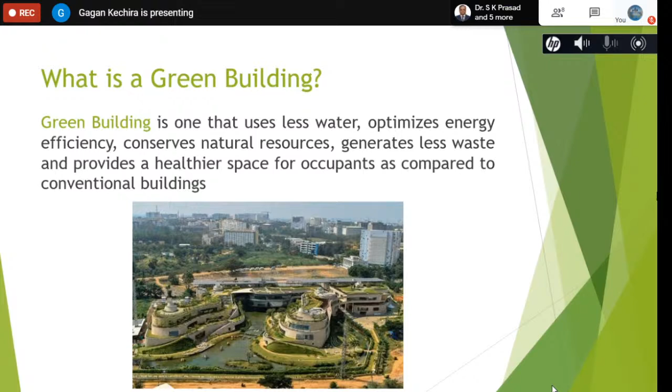So green building is not something which just uses less water or optimizes energy efficiency, but it does all these things - whether using less water, generating electricity using renewable sources, conserving natural resources, being energy efficient, generating less waste, and also providing a very healthy environment for building occupants compared to a conventional building. That is what defines a green building.

So what are the key attributes? The key attribute of a green building is that the concept of sustainability is taken care of during the course of the project - meaning it is integrated at every different step. I want you civil engineers to understand that sustainability is not just in the scope of the architect, nor the electrical or mechanical engineer, nor just the civil engineer. It is in the scope of every individual working on that project, whether it's the architect, the construction agency where civil engineers come in, or the design team designing electrical or renewable systems.

It is the plumbing team, it is also your landscape team, and it also drops down to those providing materials such as your flooring, paneling, and false ceiling, etc. So the first key attribute of a green building is that the concept of sustainability is embedded at each and every step of that particular project, right from design to operation and maintenance and everything in between.

The second attribute is use of sustainable building materials. I'll touch upon why we use sustainable building materials and what is the need for that, but right now let's just say that the use of sustainable building material is another attribute of a green building. The third is use of technologies which are efficient and far more sustainable than the business-as-usual model that we use. The fourth is that it is able to reduce your resource utilization, whether during construction or post-construction.

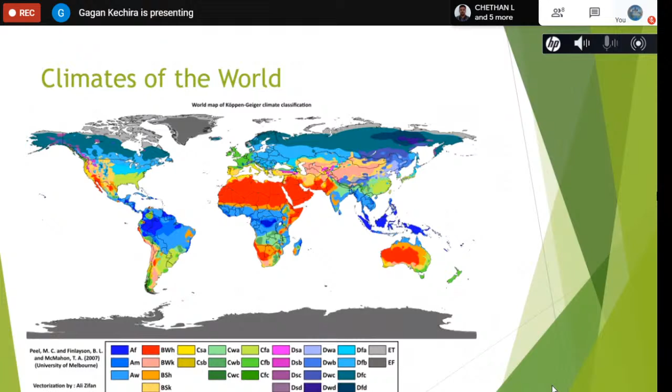I'm sure as civil engineers you would have heard of the NBC, the National Building Code. NBC has broken India into 5 climatic zones: hot and dry, which is normally the western zone - Rajasthan, Gujarat, some parts of Maharashtra.

Then we have the warm and humid zone, which is the coastal zones of India or the northeastern zones. Then we have the composite zone, which is the northern and middle part of India, where we have extreme summers and extreme winters.

I'm lucky to be sitting in a place with a temperate climate, which comes under the temperate climatic zone. Then we have cold climatic zones, towards the northeast and north part of India. Now if you go back to the previous slide, there are 29 classifications there, whereas in India there are 5.

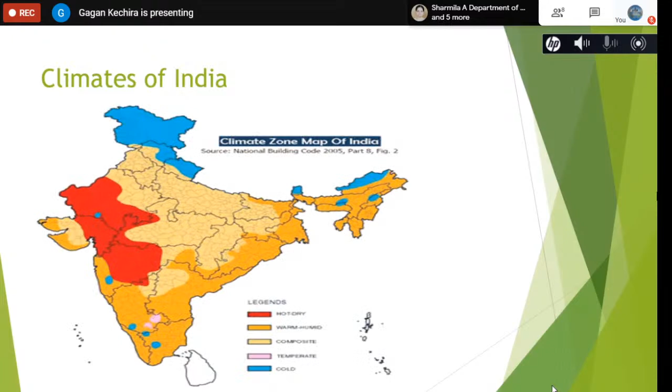Then, comparing India and the United States with respect to metro population, city-wise cumulatively, India's metro population is higher than that of the USA, and the metro land area is higher in the USA compared to India.

However, the population density, because population is more and area is less, is much higher in India than in the USA. Climate-wise as well.

So let us take an example of, let's say, Mumbai and New York City.

If you look at the table, the highest temperature recorded in Mumbai is in the month of April, which is 42.2 degrees. And the lowest recorded is probably in January, which is 16.8.

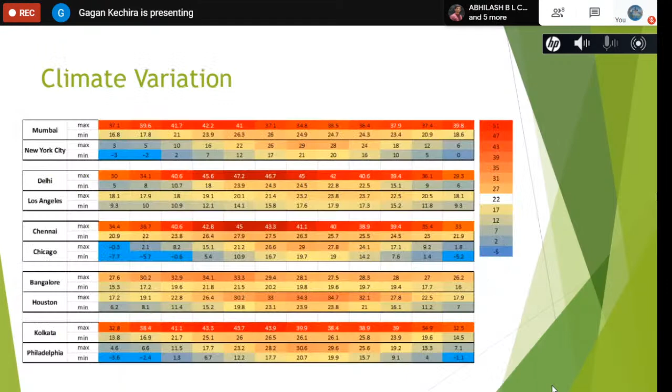Absolutely not. That is the reason I made a comparison between India and the US with respect to the land, the population, and the climate as well. And that is where GRIHA comes into the picture.

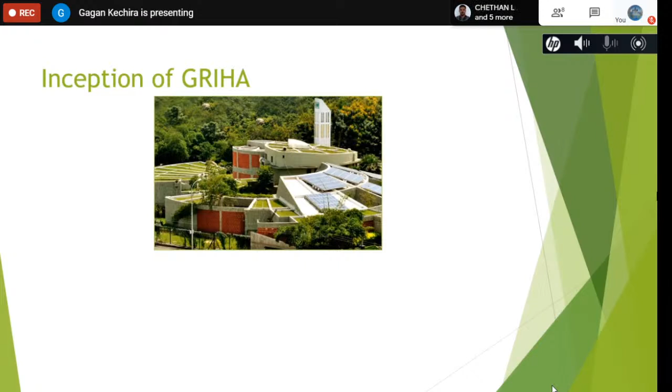So here is where the inception of GRIHA started. This building that you see is based in Madhapur in Hyderabad, currently Telangana. This was the first green rated building in our country, and this is a LEED Platinum rated building, rated in the year 2001.

Now, LEED is another sort of rating system available in our country, run by GBCI, the Green Building Certification Incorporated, which was erstwhile also known as the USGBC, or the United States Green Building Council. Of course, that is part of the training wing at this point of time.

So USGBC came out with a rating, and this particular building was rated under the USGBC's LEED rating variant, and it got the highest rating, which is the LEED Platinum rating, back in 2001.

Now, please remember, when you are rating a green building, there are three entities involved. One is the client, which in this case was CII Godrej. The second is the green building rating body, which in this case was USGBC, or the United States Green Building Council. And the third entity is called the green building consultant.

Now, this project was being consulted by TERI, or the Energy and Resource Institute, erstwhile known as Tata Energy Research Institute. When they were collating the documents, doing the simulations, etc., and comparing it, they realized one fact.

They realized that the concept based on which this particular building was being rated is not as per the Indian context, be it the climate or the norms, like the NBC or the CPCB norms or the ECBC, etc. So then TERI decided, why don't we have our own indigenous rating system?

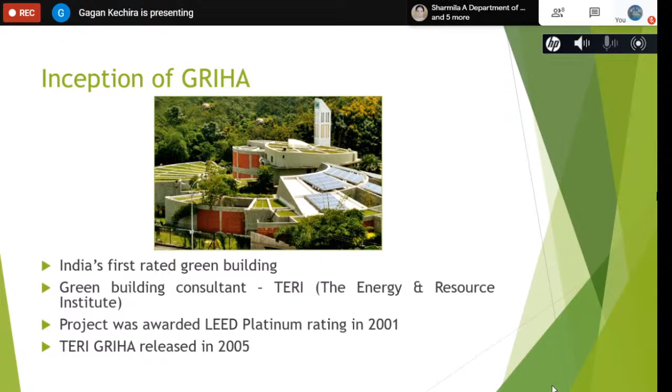And that is how TERI GRIHA was launched in the year 2005. That was the inception of GRIHA. Now, GRIHA stands for Green Rating for Integrated Habitat Assessment. That is the full form.

It is nothing but a tool. When you're rating your particular building, this GRIHA becomes a tool to facilitate the design, construction, and operation of a green building, and in turn measure how green your particular building is, or rather measure the greenness of a building.

Now, this particular rating body, GRIHA, which I represent, is being adopted by the Ministry of New and Renewable Energy, Government of India, and of course was developed by the Energy and Resources Institute. And the formula by which we go is: what gets measured gets managed.

I have a very small anecdote to this. Growing up, or even now, for those who have kids, or who have been in the position where your parents would compare your electricity bill and say, in June I spent only 1,000 rupees on electricity bill, why even in July, having the same climatic conditions in Mysuru, am I paying 200 rupees more? What is going wrong?

Turn off the light before you exit a room. Turn off the geyser, why are you having the geyser? So until unless you measure it, you will not be able to manage it, right? So that is the concept by which GRIHA Council works: what gets measured gets managed.

The timeline, as I said, is TERI GRIHA was launched in 2005. It was adopted by the Ministry of New and Renewable Energy in the year 2007, and the council itself was established in 2009.

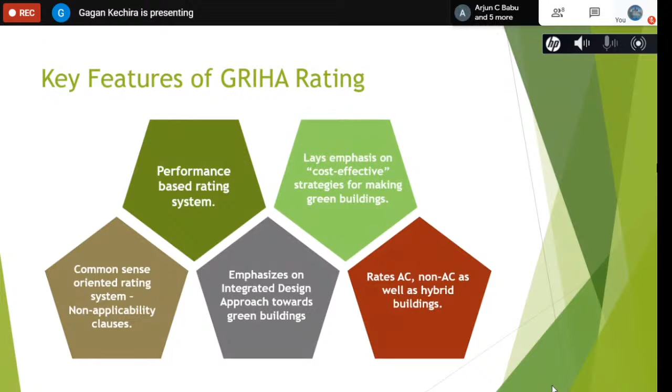GRIHA version 2015 has 9 different sections. You need to identify what these sections are, and always think about the 3 pillars of sustainability, and how GRIHA is tackling or addressing the requirements of these 3 pillars.

So here we have site planning, construction management, energy, occupant comfort and well-being, water, sustainable building materials, solid waste management, socio-economic strategy, and performance monitoring and validation. These are the 9 different sections based on which your particular building is judged or rated.

The point weightages are in front of you. The highest weightage in our rating is given to energy, about 20%. As the description notes, energy efficiency is an important aspect, and identifying the importance of not just energy efficiency but energy in general, and the role it plays in making a building sustainable, is what we're addressing. Therefore the highest weightage in this rating variant, or any other GRIHA rating variant, is given to energy, about 20%.

Then we have water. In our country, we've read articles, reports, and studies saying the country is running out of water, Bangalore is running out of water, but unfortunately we don't look at water as a commodity. So we thought it's high time water is looked at as a commodity, and that its importance in a project, post-construction and during construction, is taken care of. Therefore the second highest weightage is given to water, about 17%.

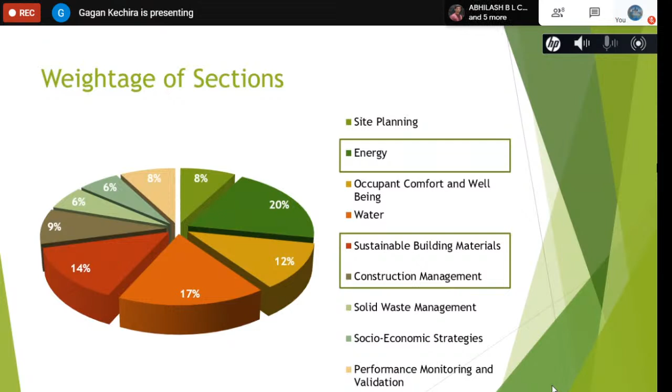So the points you can achieve - I said it's a performance-based rating system, and you'll be rated on 100. In case your project achieves somewhere between 25 and 40 points, you're eligible for 1 star. Every 15-point increment, you get 1 additional star.

So if you want to look at those buildings which are sustainable or highly sustainable, those would come under the bracket of a 5-star rated GRIHA projects, and that would have a point between 86 and above.

Now, without any further ado, let's get into the best part of our presentation. So the energy section of our rating has 3 criteria. Each criteria has an appraisal, meaning what is it that GRIHA is asking a project to do. We will take that up in the slides which come up next.

But out of the 20 points, it's broken down like this. You may also notice points given across the criteria, and also something called M. M essentially means mandatory, meaning that if you don't comply with the mandatory requirements of these criteria, then your project will be denied the rating. Meaning that GRIHA is trying to ensure that there is a bare minimum efficiency or renewable energy generation or use of low ODP materials which is being done in your project.

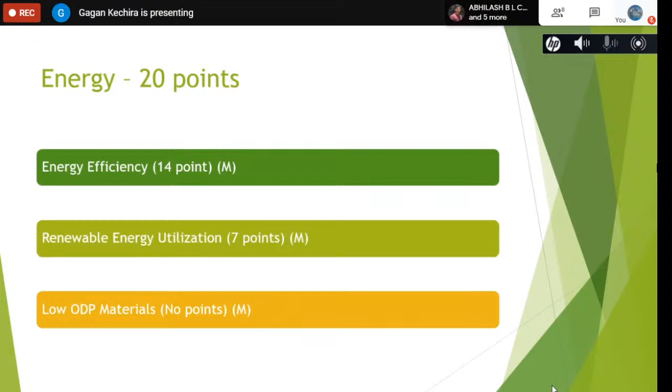So 14 points in our energy section is on energy efficiency. 7 points are attributed to renewable energy utilization, and no points are attributed to low ODP material because the entire criteria is mandatory. Moving on, the approach that GRIHA uses in order to make a building sustainable energy wise

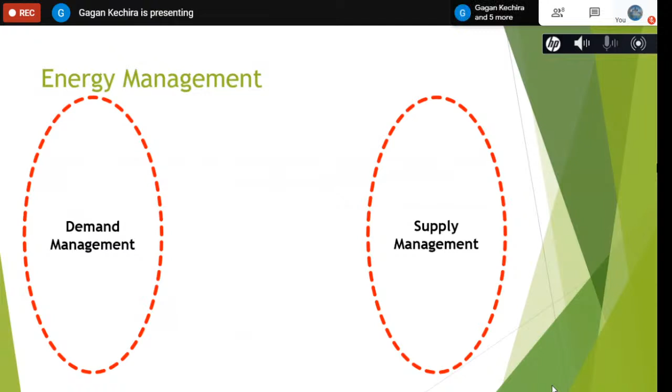is something called demand side management and supply side management. Of course, we've heard this term before, probably not in the context of what I am going to say. So how is it we are going to make a building demand side managed well?

Is by these things. First is by making the building efficient, by ensuring the building is energy efficient. How are we doing that? By probably providing outdoor lighting fixtures which meet the minimum luminous efficacy, or which are provided with automatic timer control. That is one way of reducing your energy consumption.

The second thing is by the design itself. So like I said, the design of a building also plays a factor in making a building green. Fun fact, the way that you orient a building, in which direction the building is oriented, will have a huge impact on the energy consumption of that particular building.

I'll give you a very small example. Let us say that a building is oriented in such a way that the common spaces - let's take an institute - let us say that the commonly utilized space, that is your classrooms, or your HOD's office, or the principal's office, etc., is oriented on the east and west facade, that is the east and west direction. Now, is that efficient? Definitely not.

Why is it not efficient? The sun rises in the east and sets in the west. So as it takes its path, what it is doing is it is constantly heating up your spaces, which is in the east and the west direction. So if it is constantly heating your space, what would you do to make yourself feel more comfortable?

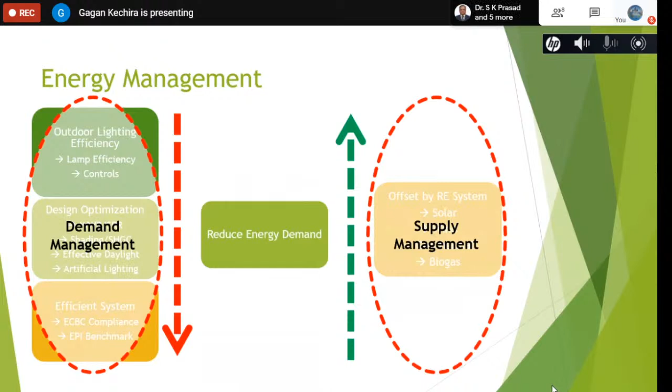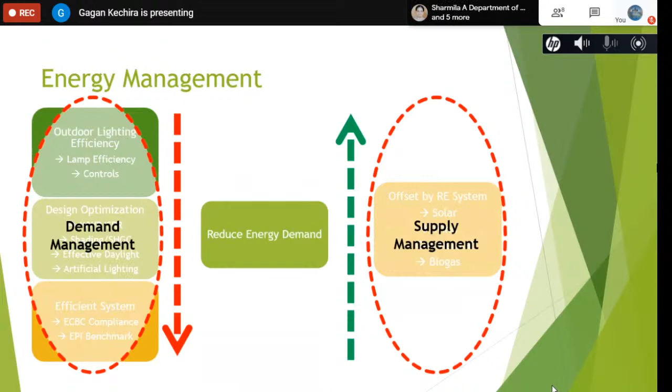So you see the beauty here. First, we are reducing the energy demand by making my building more energy efficient, and then we are offsetting the required energy. Let's assume my building is inefficient and consuming about 1,000 units of electricity a month. By making it energy efficient, I can reduce that requirement to 600 units. And then in those 600 units, or a part of it, I can cater using a renewable energy system. That is exactly what GRIHA is also trying to tell.

So we spoke about ECBC - Energy Conservation Building Code. This is something developed by the Bureau of Energy Efficiency, a department under the Ministry of Power, Government of India, where I had the good luck of working for a few years. There we worked on development of ECBC. Of course this is the older version - we have a newer version launched in 2017, but this particular rating variant talks about ECBC 2007.

Now ECBC looks at 5 components of a building. The building envelope - meaning the building's walls, windows, glass, the facade, the roof, etc. The second aspect talks about HVAC, or heating, ventilation, and air conditioning - what kind of chillers and AC systems are you providing, and are their efficiencies as per the requirement? That is what ECBC does.

Service hot water and pumping is another aspect which ECBC 2007 looks into. Then we talk about lighting, where artificial lighting is looked into - is it as per the task specific lighting requirement? And finally we talk about electrical power, where we're talking about the motors installed in your site, the kind of transformers, piping and ducting that you use, etc.

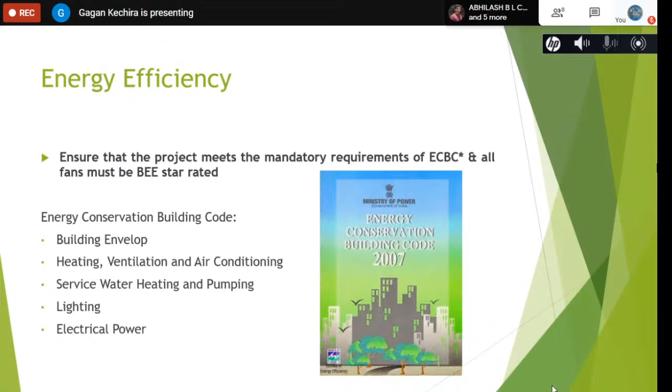And in GRIHA, only and only if you are able to meet the mandatory requirements of this ECBC will your project be eligible for the rating. And also GRIHA says that all your fans, that is your ceiling fans, have to be BEE star rated.

Now apart from that, we also talk about the envelope peak heat gain. So I told you that with the type of facade you design, there is some heat being transferred. Please understand that heat is not only transferred through your windows, but also through your roof and your walls. So GRIHA is saying, as per your climatic zone, you will have to meet GRIHA's threshold for building envelope heat gain factor.

Now, in case yours does not fall into the purview of what is being mentioned here, it basically means you will have to design a heating, ventilation and air conditioning system of a higher capacity. And what happens if you install a higher capacity system and constantly use it, your energy consumption would go high. Therefore, this is something taken care of under the energy efficiency criteria of a GRIHA rating.

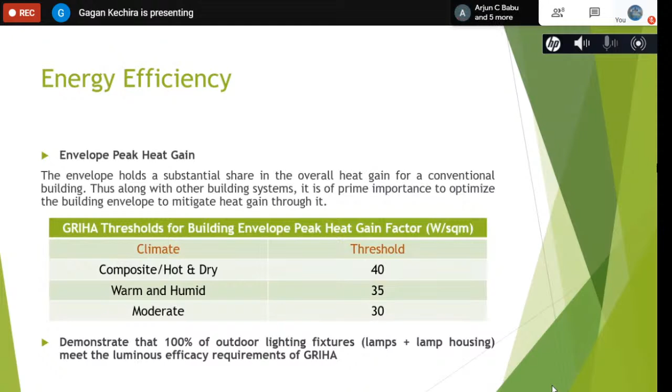Then we say that 100% of your outdoor lightings, whether it's street lights, floodlights, or facade lights, everything has to have a minimum luminous efficacy of 75 lumen per watt as per GRIHA.

And then we come to the point of EPI, which stands for Energy Performance Index. It might sound complex, but it's very simple. It is nothing but your building's annual energy consumption divided by its built-up area. So that is what EPI is.

So what GRIHA says is, depending on the typology of a building, the scenario of your building, or the operational aspects of a building, your EPI has to be less than what has been prescribed by GRIHA.

For example, let's say I work in a commercial facility in Bangalore, which comes under the moderate climatic zone, and this facility is operational for 5 days a week and 8 hours a day. So there I have to prove to GRIHA Council that my building's energy performance index is less than 75 kilowatt hour per square meter per year. In case it is not, your building will be denied the rating.

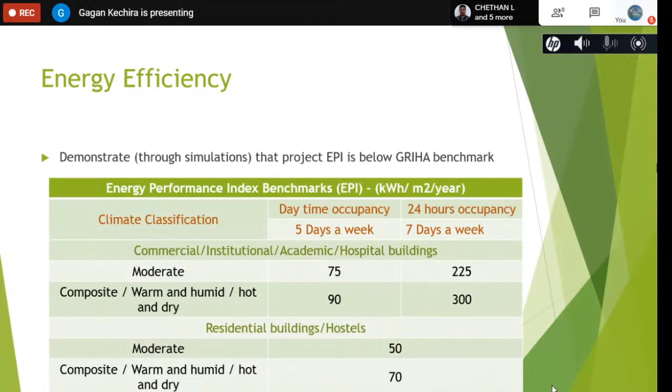Now, in case it is, then you will be eligible for the rating, and also the higher the reduction that you exhibit, the higher the points that you get. So this is how GRIHA is taking care of the energy efficiency aspect of energy.

Next, we talk about renewable energy utilization. Of course, the first thing that comes to our mind when we talk about renewable energy is solar, because that's something which we see, whether it is hot water or solar PV panels.

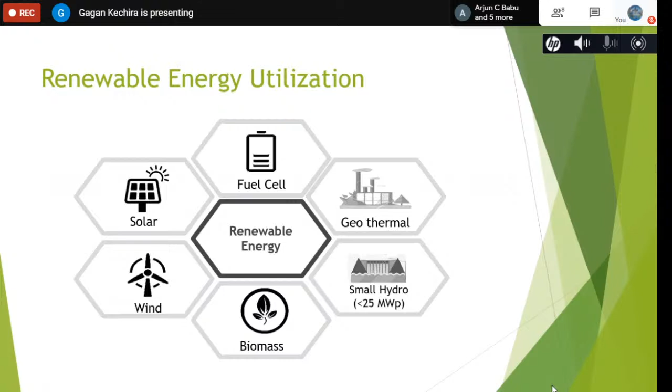Of course, other sources of energy are also considered renewable energy by the Ministry of New and Renewable Energy. Before I come to what GRIHA is trying to do, India's target is that 40% of our energy generation by 2030 will be through renewable energy sources. Right now we are at 23%.

So everything else is with respect to thermal or other ways. We'll have to reach 40% by 2030, so the Indian government also has a short-term plan.

India is going to target ensuring about 175 gigawatt of renewable energy capacity by 2022. That could be in the form of solar, which is about 100 gigawatt, wind, about 60 gigawatt, biopower, about 10, and small hydro, about 5.

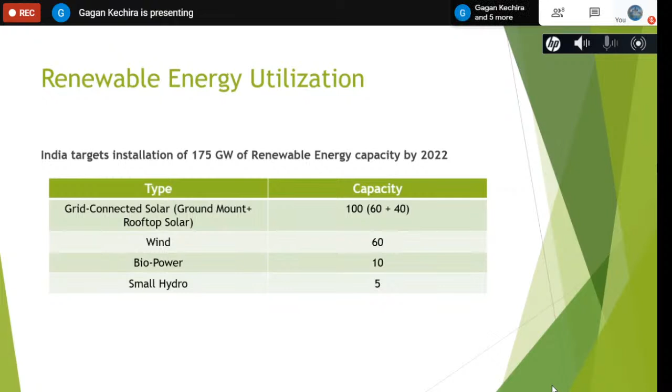This particular slide is about integrating your renewable energy system in your building. The reason I put this slide is to tell you that if the idea of sustainability is embedded in the heads of the people working on the project, then everything becomes simple, because you can optimize your renewable energy system and make it a part of your building itself.

So here we have four examples. One, you can install it on the rooftop like a building material. One, you can install it on the wall as a curtain material. One, you can use it as sunshades. One, you can install it as your daylight or skylights in your project.

See, this is the beauty of sustainability. Everything is interlinked with one another. Aesthetically as well, it would look beautiful because these are panels installed at the same time. That is what I'm trying to get at, the intent. The idea has to be there. The students, the people working in this industry should be aware of what they want to achieve, and if they put their heads into it, I'm sure they can achieve it.

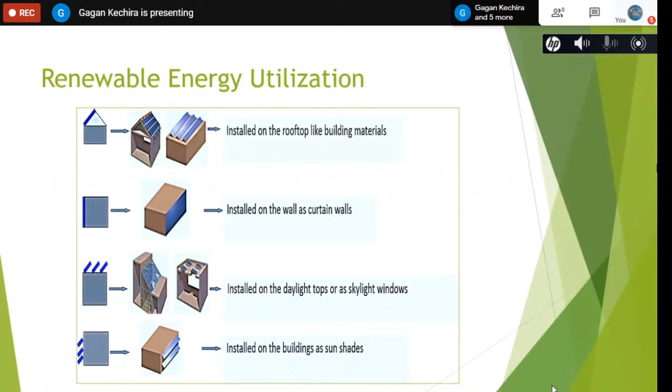So some other examples of how PVs have been integrated in the building architecture as well. And here what GRIHA says is that, with respect to renewable energy, now that you've made your building efficient...

Now what we need to do is make your building cater to that energy requirement through renewable energy generation. So let's say, as I was giving you an example, 600 units of electricity is your consumption. That is where you will have to cater to that 600 units, or a part of it, by installing renewable energy systems in your project. So this is about renewable energy.

So the first thing I've done is reduce my building's energy demand by making my building efficient. The second thing I've done is cater to that requirement through a renewable energy system. The third criteria that we have is about ODP.

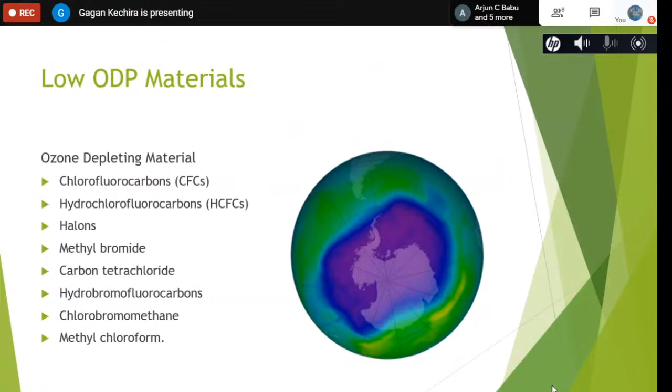Meaning, the interventions we are going to be doing now are something which will show positive effects in another 80 years. So imagine the damage we've already done and the dire situation we are at at this point of time, and the need to go sustainable and construct sustainable buildings is very, very vital and important in today's scenario.

So that was about energy. Now we go on to something you might be interested in, construction management, because this is something a civil engineer would attribute himself or herself to. Here we have three criteria: air and water pollution control, preserve and protect landscape during construction, and construction management practices.

Now air and water pollution control is for 1 point, and it is also a mandatory requirement. In this criteria, we are saying that during construction, you need to ensure ample steps to mitigate air and water pollution. Some of the strategies mentioned are 3-meter high barricading around the construction area, using wheel washing facilities, covering fine aggregates when not in use, sprinkling water over fine aggregates, and if you have a DG set on site, having the stack height above average human height and facing away from the site so it's not polluting the air.

Now, in case you have taken care of spill prevention - we all know there are a lot of hazardous materials which would come into your site. It could be diesel if you're using a DG set, bitumen if you're laying roads, or hazardous admixtures during construction. So what GRIHA is saying is, in case you've taken ample steps to ensure the spillage of these hazardous materials is prevented, you will be eligible for 1 point. So this is about air and water pollution control.

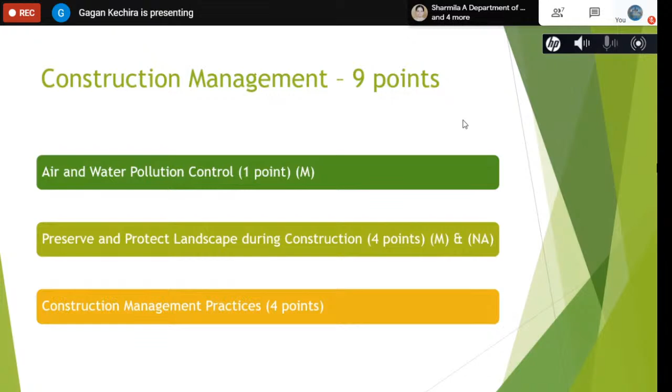So this is the last bit of construction management practices. This basically constitutes your construction management for 9 points. So let's look at some examples.

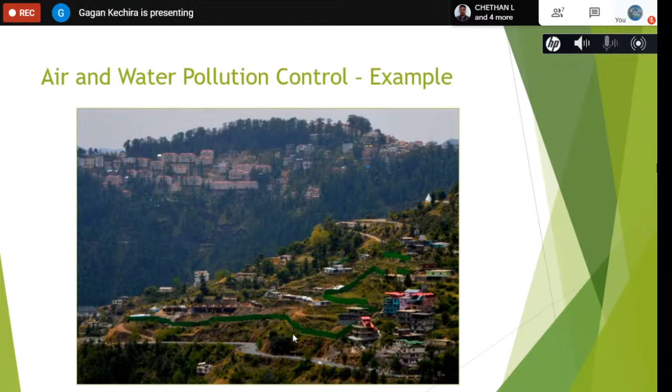This is an example of 3-meter high barricading provided around the site. Good practice. This particular slide is one of my favorites. This is a site in Shimla, and if you can see my cursor, there is green barricading that has been provided. The reason I have this slide is, normally project teams say, sir, we are not able to provide the barricading. But if a project in Shimla, on such a contoured site, is able to provide barricading, any project on a plain site can definitely provide barricading.

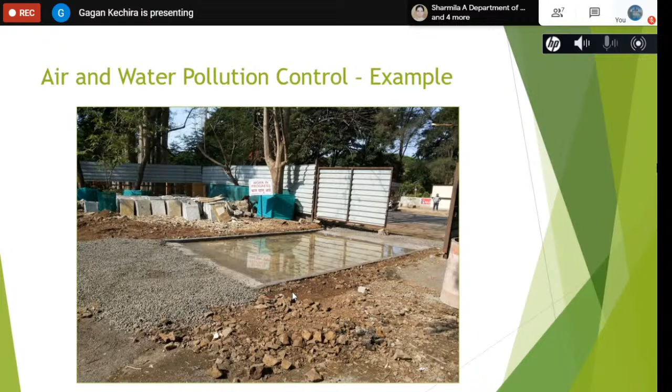Wheel washing facility at vehicular entry and exit. The utility of a wheel washing facility is that when the wheels get wet and move into your site, the fine aggregates or dust would stick to it and not rise, hence preventing air pollution. So this is another example of a wheel washing facility.

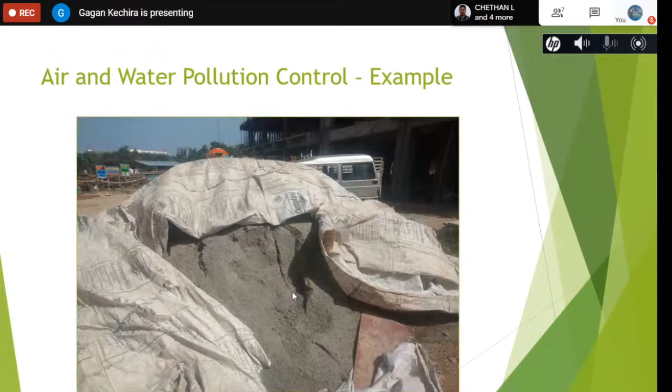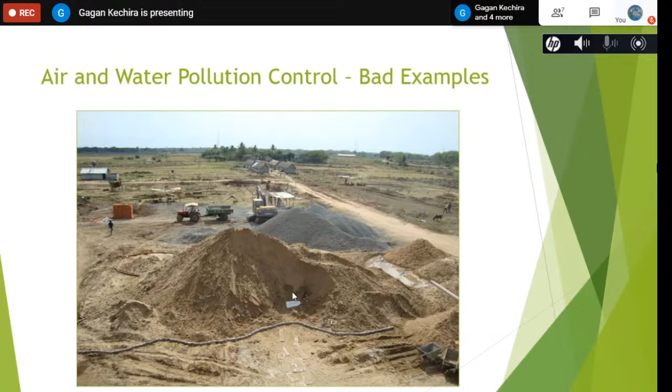Covering of fine aggregates - why? Because if it's not covered and there's a gush of wind, the material can get airborne. So this is a bad example: the fine aggregates are not covered, things are spread out, there is no staging happening. If you look at the far right corner, there is water stagnation.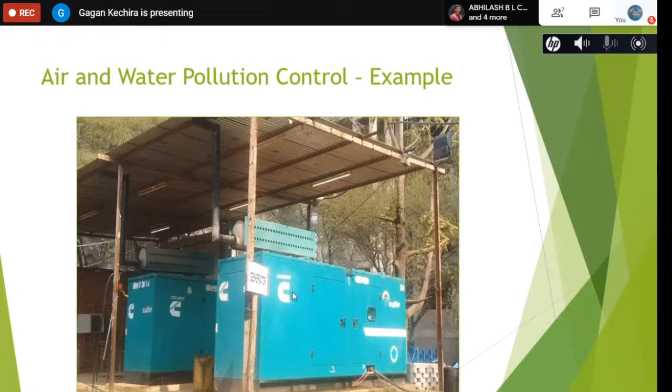This is a good example of a DG set having the stack height above average human height, which is what we want. This is a bad example where the DG has a low stack height, meaning the fumes would directly go into the site, causing pollution. That is something you don't want.

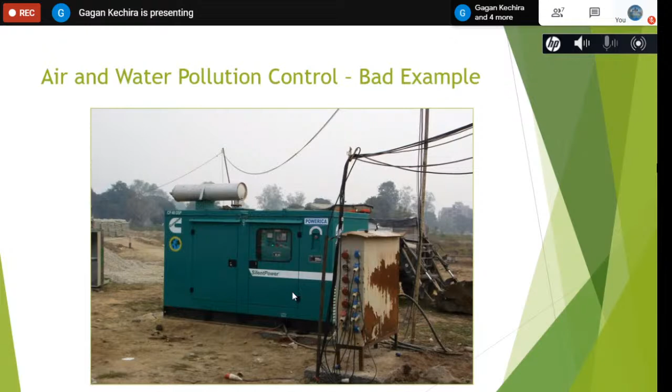This is a good example, which is what we meant when we said you need to address spill prevention. Here, what they have done is store the diesel coming into the DG on an impervious surface. When you place it on an impervious surface, it will not seep into the ground, and therefore the soil is not contaminated.

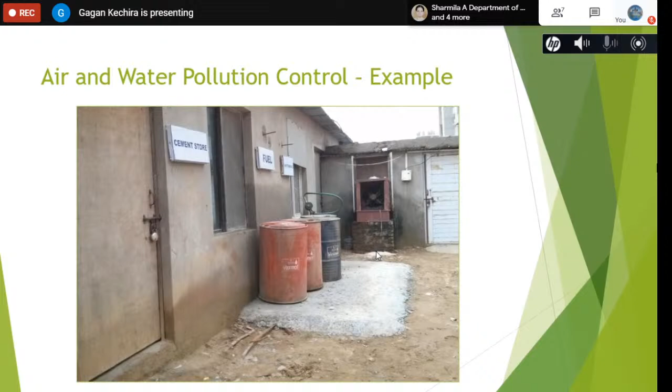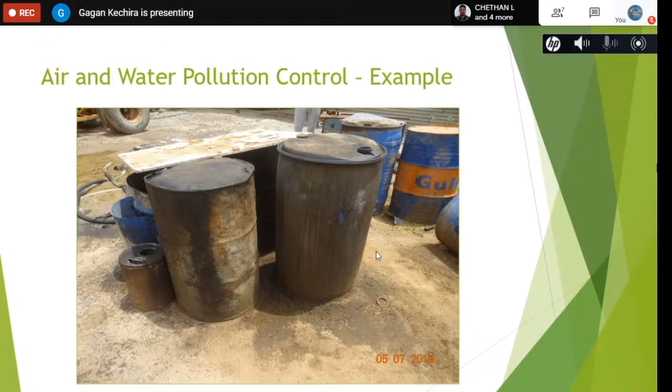Here this is not what we expect, because here you see the DG, the diesel, is stored directly on the soil, and because of this there is contamination of the soil happening.

Now, when I say preserve and protect, I told you that when you get to work on a project, it is not just the project but also the site, not just the building but also the site that you get to work on.

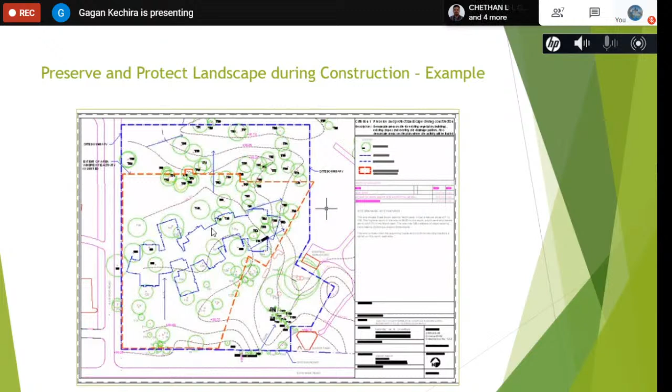This is a brilliant example, the IIT Kanpur building. If you look at this building, you see these blue marks or blue lines, which are obviously the building footprint, and the green circles are the trees. This is one place where sustainability is considered right from the design stage, because they designed the building in such a way that they avoided cutting down most of the trees. So the building was designed to minimize cutting down of mature trees.

This again is an example of trees that were transplanted on site. So it is not just preserving trees, but also protecting them. We also want you to protect the trees during construction.

We conduct 3 site visits at different stages of a project, and this is something that we check during our site visits, and this is a mandatory requirement. In case you don't abide by it, your project will be denied the rating.

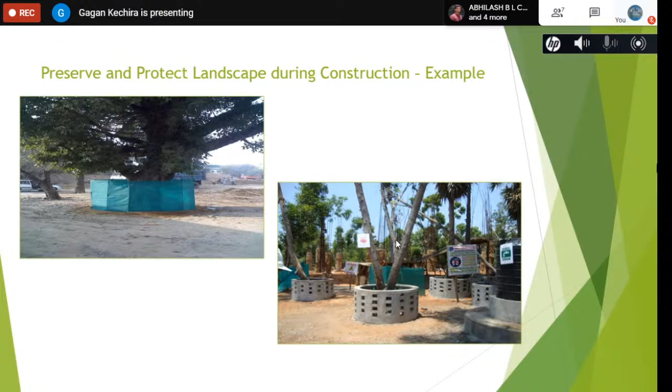This is a good practice of how you barricade trees. This is not a good practice - on the left, sand is stored around the trees; on the right, construction materials are stored around the tree. What is this going to do? It's going to harm the trunk, and if it's too harmful, the tree might also die. That is not something we want.

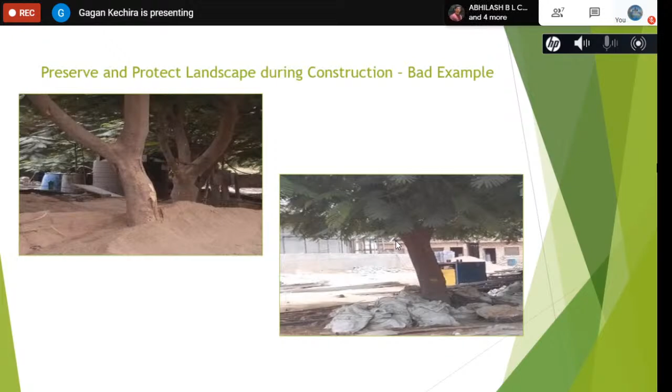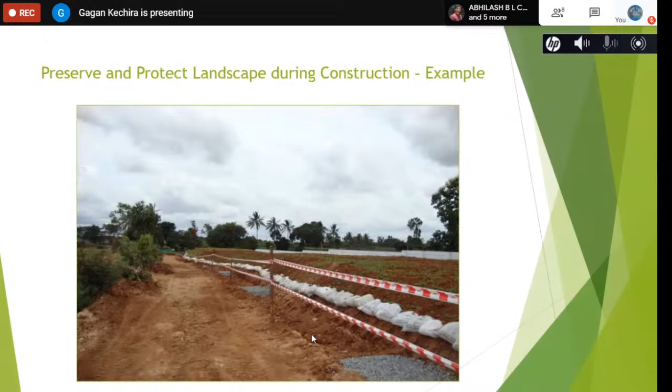With respect to topsoil preservation, this is a brilliant project in Bangalore. If you look on the right-hand side where my cursor is, this is the topsoil they stripped off from the site, and they were able to grow something in order to retain its fertility. They used empty cement bags, which is a construction waste material, to ensure it does not flow out during the rains. They also provided a channel so that even if it runs off, it is stored in that particular area. This is a good example of staging.

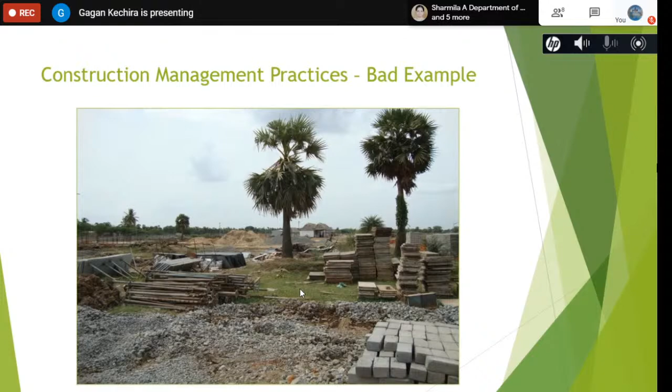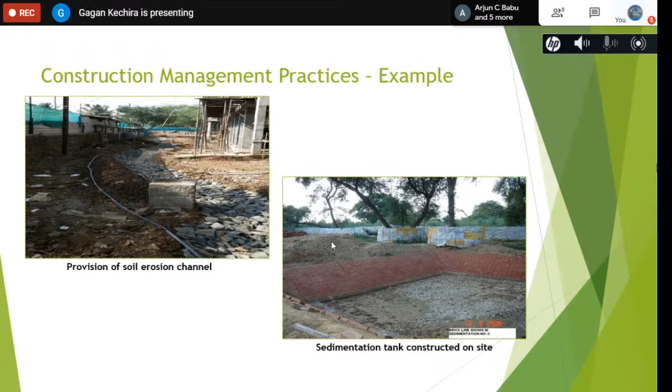Again, if you look at these bricks used in the walls of the sedimentation tank, these were the same bricks used to construct the boundary wall as well. Why? Because some curing needs to be done to the red bricks, and they were able to take care of that when the water got saved in the sedimentation tanks itself. This again is the beauty of sustainability - if the team has the intent of achieving true sustainability, you can achieve it very easily.

And why is water stagnation bad? We know water stagnation leads to breeding of mosquitoes. Mosquitoes are disease carrying insects, so in case one bites somebody, they get infected with, say, dengue or malaria or any other mosquito borne disease. Then you're going to be losing a large amount of your workforce, and a lesser workforce will not be able to complete the work on time. So you see, every aspect that you're going to be doing on site is going to affect sustainability.

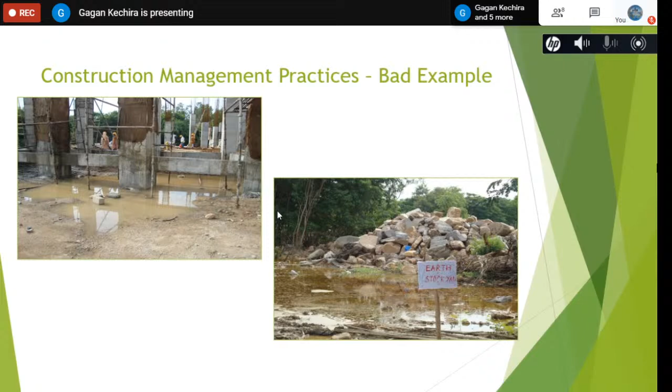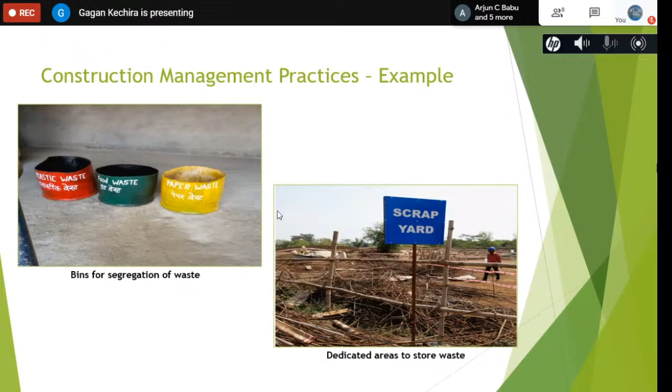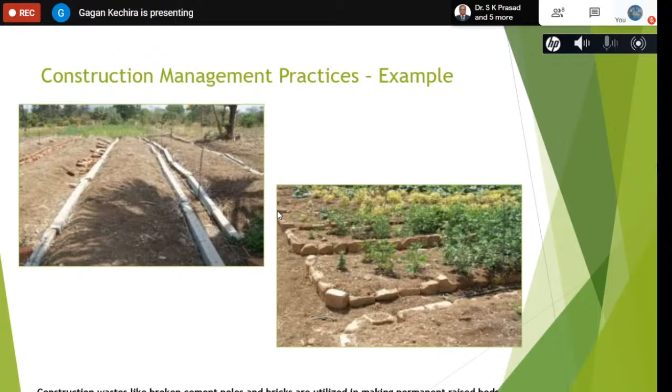Now, another beauty is your construction waste can be employed. I already gave you an example of empty cement bags, but broken cement poles and broken bricks can be utilized in making permanent raised beds for farming as well. So that ends your construction management section.

Now, moving on to the last section I want to talk about in this presentation is sustainable building material. Again, this is something which you people would associate yourselves with as civil engineers. This is something which is broken down into three criteria.

One is use of BIS recommended waste material in the building structure. Here, when we're talking about BIS recommended waste materials, this could be GGBS, slag, or fly ash. Fly ash is a waste which comes out of your thermal power plant. Normally it ends up going to landfills, but studies have shown that you could use it in construction as well. Of course, there are certain norms — you can't replace cement beyond a certain amount.

So GRIHA says if you are able to replace the cement in your structural concrete, and your cement which is used for plastering and masonry mortar, then you will be getting points. Now, if you're also able to show that at least 40% of your building blocks composition is a BIS recommended waste material, again you'll be eligible for points.

So again, here we look at structural concrete. We talk about cement that is used for plastering and masonry mortar, and we're also talking about the building blocks. So this is how we are talking about utilization of BIS recommended waste materials.

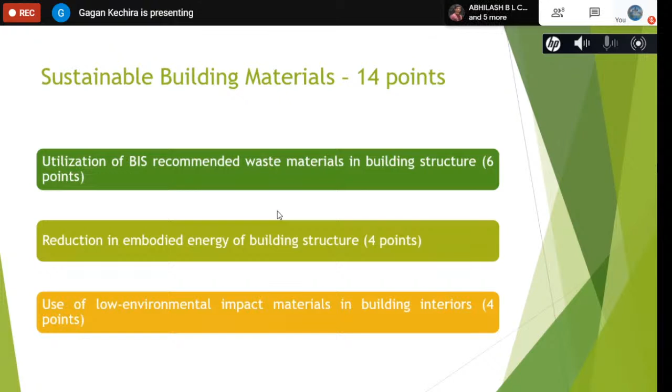So GRIHA says if a certain percentage, let's say 25%, of your building interior — and what do we mean by building interior? Flooring, false ceiling, paneling, inbuilt furniture, interior doors and windows, and door and window frames — if these are low environmental impact materials or green materials, then you will be eligible for points. So this, in simple terms, is what the sustainable building section is trying to capture.

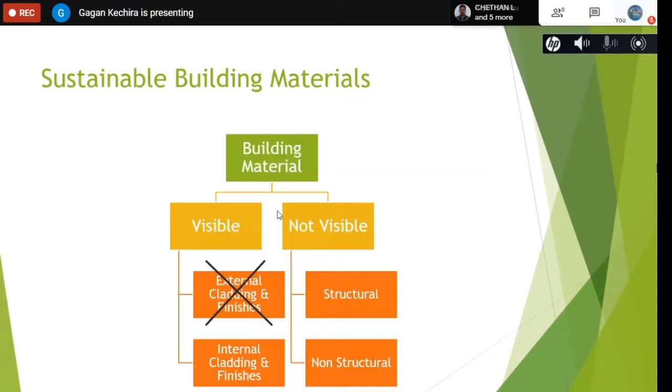So of course, in buildings we have visible materials and non-visible materials. In GRIHA, we don't talk about external cladding and finishes, whereas we do look at internal cladding and finishes, structural and non-structural. So this is an example — of course, there are two types of cement used, OPC and PPC.

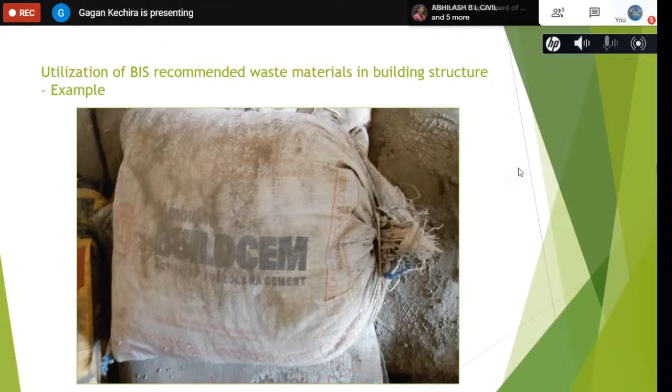So with OPC, if you are adding fly ash or GGBS and replacing cement with a certain amount, then you'll be eligible for points. And if you're using PPC, which has got a certain percentage of fly ash content, you are good to go. Use of fly ash bricks is one other example. This particular project, I think, is in Naya Raipur.

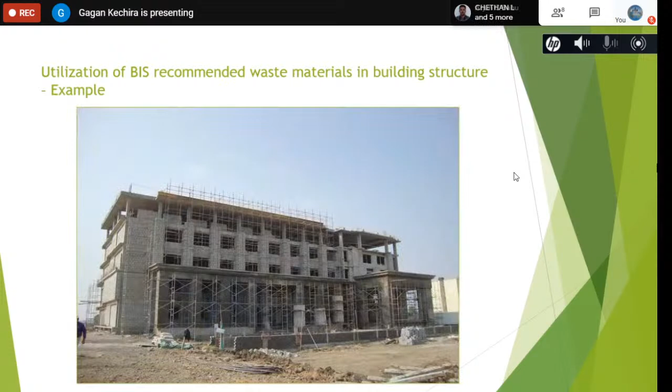So here they've used AAC blocks for both load bearing and non-load bearing walls as well.

As I said, embodied energy - if you look at this particular table, the highest embodied energy is with respect to concrete, which is more than 200, around 210 gigajoules, followed by steel, which is about 140 gigajoules. If you are able to reduce your embodied energy just in concrete and steel, you will be able to show a drastic reduction in embodied energy, and that is what GRIHA is trying to achieve.

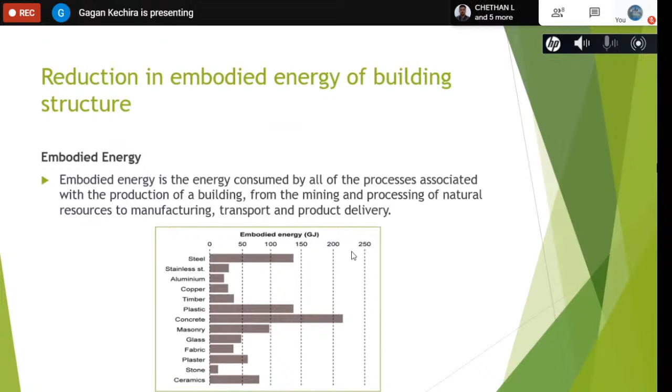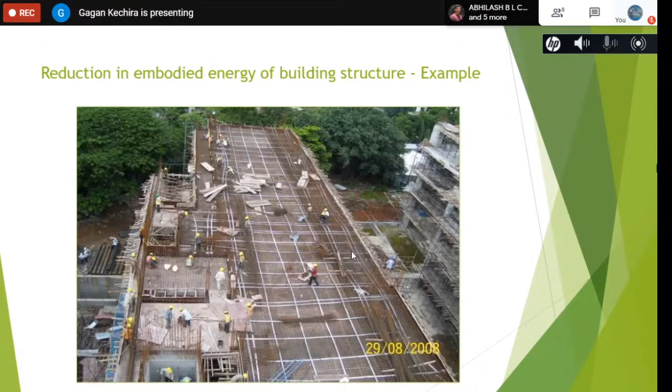One of the examples of how you can do it in your building structure is by using PT slabs. In PT slabs, what's happening is you're going to be using more steel but less concrete, right? I'm sorry if I'm wrong there since I'm not a civil engineer, but I understand that is the right concept - you use a little more steel, but a lot less concrete, and hence you reduce the embodied energy of the project.

Some examples of interior materials are gypsum false ceiling, engineered wood, and local stones. Local stones in GRIHA's context is any stone in India. So for example, you could be constructing a building in Mysuru, but you've procured the stone from Kota, Rajasthan - it is still considered low energy or low environmental impact flooring. Or you could be constructing a project in Himachal Pradesh, but you've got Kadapa stones there - that is also considered a low energy stone.

This basically ends the topic of energy, construction management, and sustainable building materials. I've also told you the benefits of a green building, but let's look at the benefits of a GRIHA project. The benefits I mentioned earlier on are more generic benefits, but these are benefits which have been quantified from the projects that have been rated by GRIHA Council.

A GRIHA project is able to exhibit about 30 to 50% reduction in energy consumption, which is humongous. For example, big IT buildings are essentially spending lakhs and crores of rupees every month in energy bills. Now, if you're able to cut that by 30 to 50%, that is a positive, right? So environmentally, you're doing good, and similarly economically also you're in a good place.

Second thing is renewable energy utilization to offset grid demand. So we are ensuring that the project is going ahead and integrating renewable energy, which is a cleaner source of energy, into that particular building.

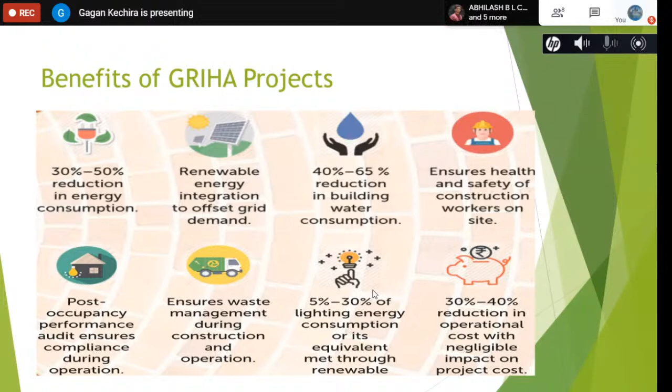But by mandating the mandatory requirements of ECBC and GRIHA, what GRIHA is also doing is ensuring that ECBC is getting implemented in those states that have not included it in their building bylaws by notifying it. And also by ensuring renewable energy is being implemented, we are working on the vision that the government has of achieving 40% cumulative power generation through non-fossil based fuels. So the government has realized the importance, and because of that, the government has given certain incentives.

So some states such as Himachal Pradesh, Punjab, Delhi, Haryana, Rajasthan, Jharkhand give the project something called a free FAR or floor area ratio, meaning if the project is GRIHA pre-certified, they get about 5 to 10%. In fact, the highest is in Haryana, where they've given up to 15% additional FAR for a 5-star rated pre-certified project.

Now, how is that an economical thing? Consider you're constructing a commercial building of 1 lakh square meters. So 15% additional FAR for a 5-star rated building means you get to construct 15% more, that is 15,000 square meters more. And by constructing 15,000 square meters more of commercial area, you will be making more finances, or a benefit in monetary terms by renting it out.

That is one way. Some states or municipalities like Pune and Pimpri Chinchwad have given discounts in premium charges payable to the municipal corporation for both GRIHA and SWAGRIHA projects, and they're also getting about 10 to 15% discount in property tax for homeowners for GRIHA and SWAGRIHA projects.

Now, when I was working in the Bureau of Energy Efficiency, we tried to understand why people are not constructing energy efficient buildings. So we came up with something called the split incentive, meaning a person is constructing a building, but the same person is not using the building.

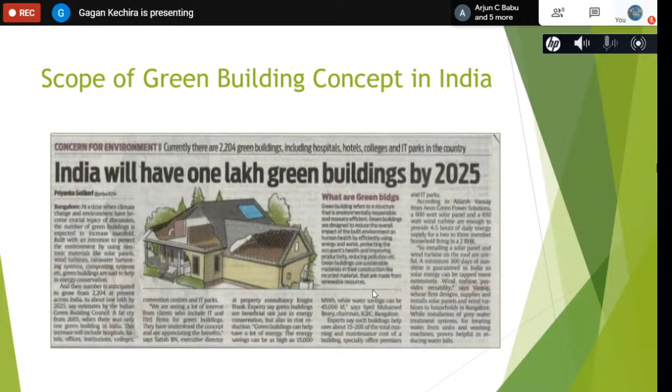With respect to jobs, it says that about 1 lakh professionals will be needed by 2025, and of course more people will be required. About 14 lakh people will be required by 2020. Of course this is an old report, so that number would have gone up drastically by now.

This is our website, www.grihaindia.org. You can go into this website and look around, you can download our manuals etc. We also have something called a GRIHA product catalog, where certain manufacturers such as Parryware, Hindware, or Asian Paints register their products, making it easier for the project to document these things.

Before I end the presentation, I have one case study that I would like to present to you. I'm sorry, I think I've overshot the time given to me, but I want to complete it and give you as much information as I can. So let us go ahead with this case study.

This is the ITC Kohenur, a 5-star hotel in Hyderabad. It has a site area of about 20,000 square meters and a built-up area of close to 50,000 square meters, out of which the air-conditioned area is about 30,500 or 30,600 square meters, and the non-air-conditioned area is about 17,000 or 18,000 square meters.

Considering it's a hotel, the EPI is very, very low, about 79.87, because a hotel is a 24/7 operational building so the EPI value has to be higher. They have been able to show an energy reduction of about 82.24%. The benchmark GRIHA set for Hyderabad is about 450 kilowatt hour per square meter per year, and this project achieved 79 or 80. Apart from that, the building's water consumption has been reduced by about 54%, which is great, and they have renewable energy installed on site of 5 kilowatt peak. This project was recently rated and is a 5-star rated GRIHA project.

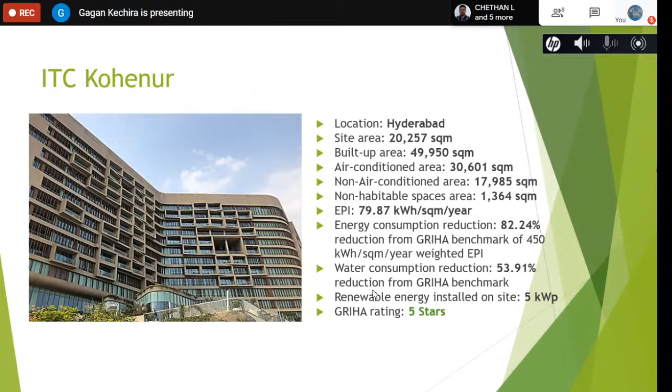Now what have they done? I told you site planning and the way you orient a building is important. In this case, the excavation was done not to coincide with the monsoon season. They adopted spill prevention measures, construction activities were restricted to pre-designated areas, and they planted native trees and limited turf.

Another fun fact for those not aware: the turf or lawn grass we get is not Indian, it is not native, and therefore requires a lot of water to keep it lush green. It was brought by the British back when we were a British colony before independence, because they wanted the lush green feeling they had back in England or Britain. To keep that look, you have to water it more, so this project limited the turf area. They preserved the topsoil and reused it for landscaping, and although the site did not have any existing trees, they went ahead and planted more native trees.

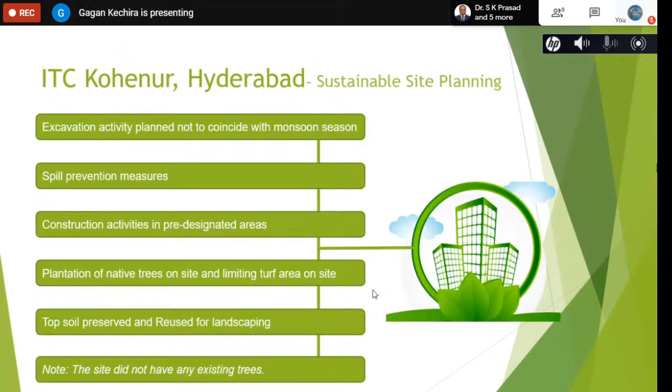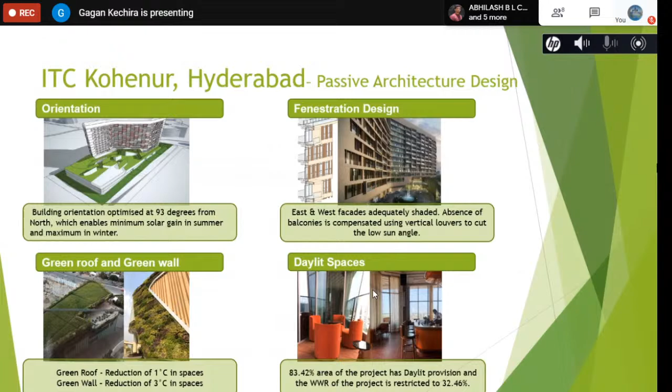With respect to water, they went with the 3 R's: reduce, recycle, and reuse. By using low flow fixtures, they reduced the building's water demand by 53.91%. By using native species and efficient irrigation systems, the landscape water demand was reduced by 63%. Then they installed a sewage treatment plant, or STP, of about 140 KLD for grey water treatment and 180 kiloliter per day capacity for black water treatment.

For a total of about 320 KLD of STP was installed. The treated water from these STPs was reused for flushing, landscaping, and HVAC makeup water. So basically they've been able to exhibit about 46.57% treated water reused.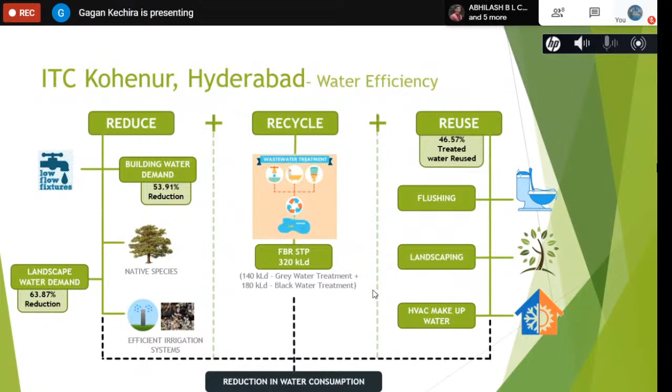With respect to renewable energy, 5 kilowatt capacity of solar PV panels was installed on site. However, if you're aware of a net zero building, this project can achieve net zero because ITC purchased about 46 megawatt of renewable energy from wind energy, out of which 2.5 megawatt is dedicated to ITC Kohenur.

So if you look at it, 100% of this project's energy requirement is being met either by solar or by wind. So it is basically a building running on clean green energy.

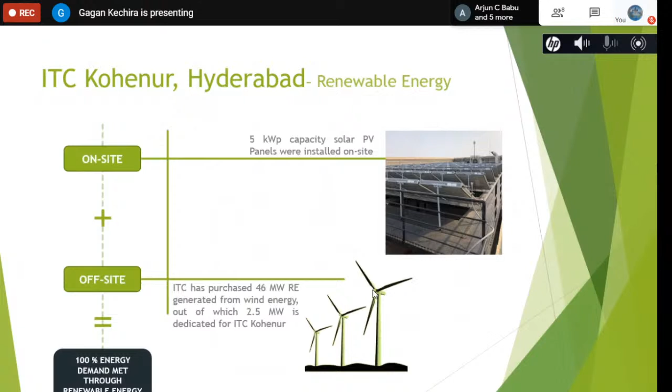With respect to comfort parameters as well, energy efficient artificial lighting was designed in compliance with ECBC recommendations. Occupancy sensors were introduced into rooms to reduce energy consumption, and external shading and efficient glazing were installed to reduce heat gain and have glare-free daylight in the spaces. Thermally, the envelope was ECBC compliant, which reduced the cooling load of AC spaces and met thermal comfort requirements in non-AC spaces as well.

And they went for a very efficient water-cooled centrifugal magnetic chiller of about 400 tonnage and a COP, that is coefficient of performance, of 6.43. They also installed a heat pump of 365 kilowatt with a COP of 3.63.

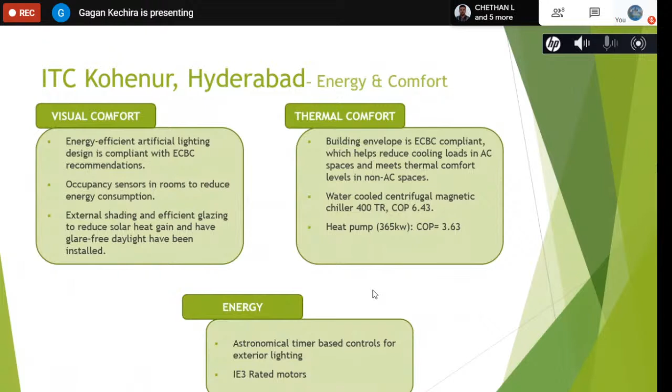And energy-wise, for the external lighting, they installed automatic timer control, also known as astronomical timer control, which switches on at 6 p.m. when it gets dark and turns off automatically when the day brightens up. They've also used efficient motors, that is IE3 motors.

With respect to materials, they've gone with gypsum and mineral fiber false ceiling. They've used FSC certified composite wood for the inbuilt furnitures. They've used drywall construction for partition walls, and provided glass with recycled content and FSC certified wood for partitions as well.

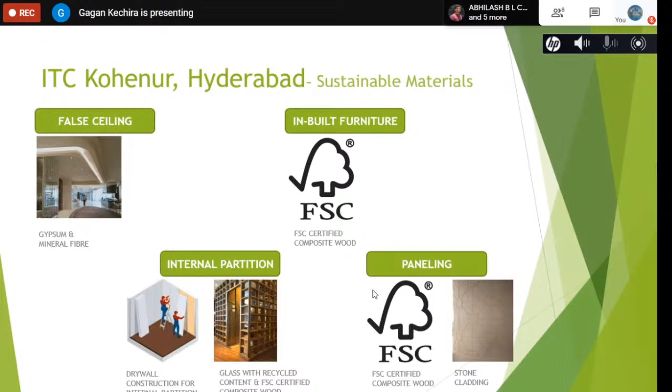And with respect to paneling, they've gone with FSC certified composite wood and stone cladding. However, there is one important factor that they did not attempt, which was flooring. The reason is, being a five-star hotel, they went with Italian marbles. They basically procured imported flooring materials, etc., which does not fit the requirement of GRIHA, and therefore they did not attempt that particular thing.